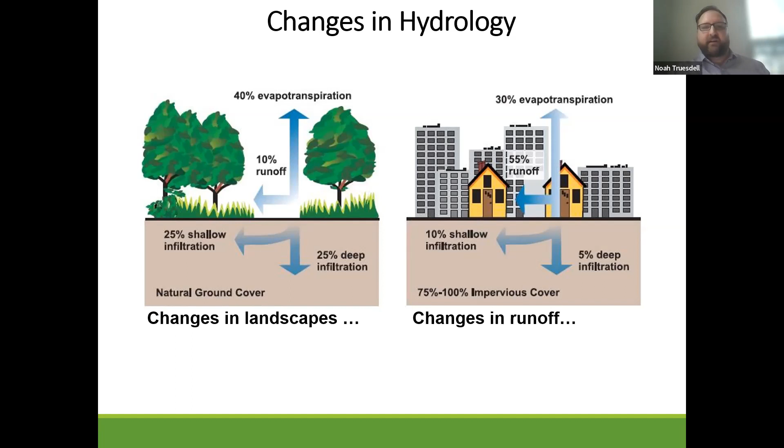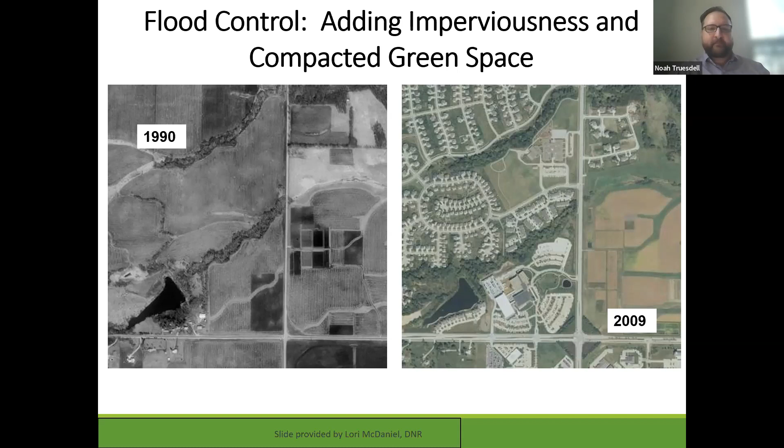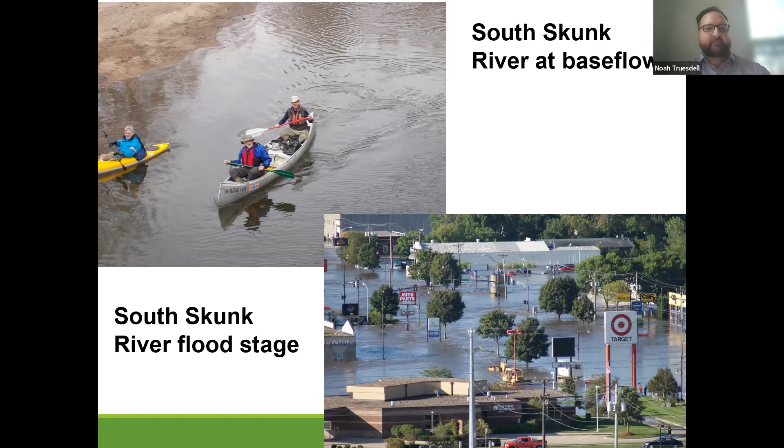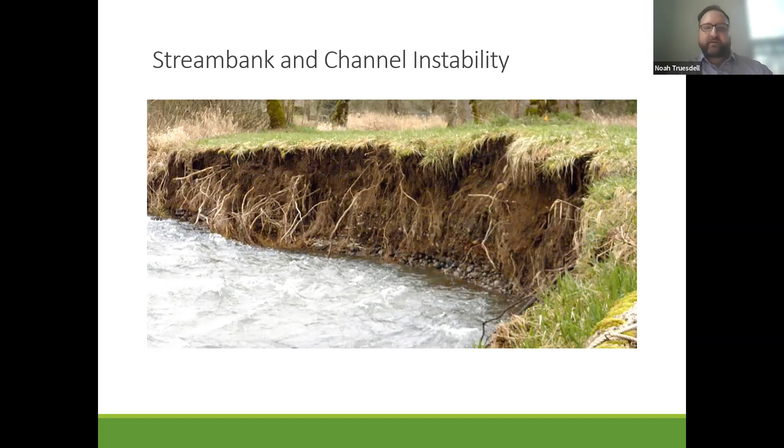So to mitigate that, we want to slow the stormwater runoff and limit how much is entering the stream at one time, as much as we can.

The other problem here is water quality control. At MS4 cities specifically, the stormwater and sewer systems are not connected, and so stormwater runs straight to a stream via our inlets into the storm drain system, and then outlets into the streams. And so it's not treated at all. Any pollution that enters those storm drains gets into the streams.

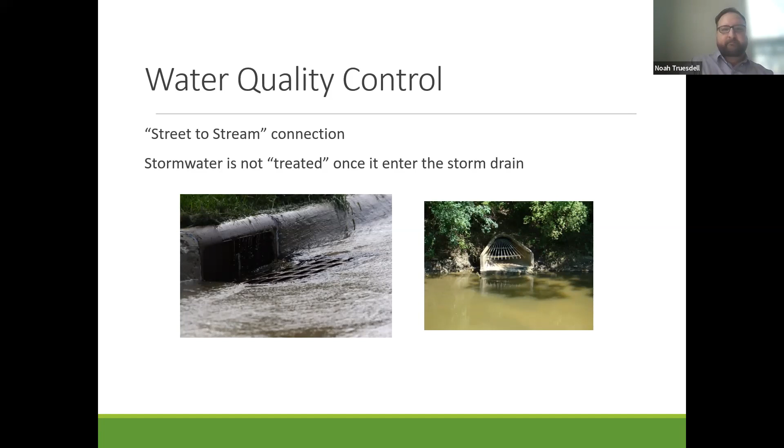The main pollutants of concern in Iowa, or in stormwater - sediment is the primary concern in Iowa. But then you also have hydrocarbons from gas and oils that are on streets from cars and stuff like that. Nutrients from fertilizers used on lawns or in agriculture. Chemicals, paint, stuff like that. Bacteria, pet and animal waste, sanitary waste, and trash and other debris.

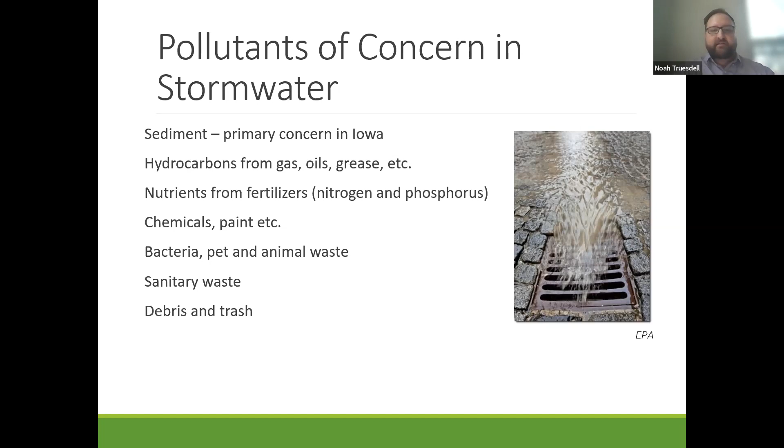The paradigm shift started back in the 70s, where what we were trying to do is just collect, convey, and discharge the water as fast as we could. That's what led to the storm drain system - just get it off the street and to the waterway as fast as you can. And then, like I said, you run into the problems of erosion, flooding, and pollution in your water.

So now what we're trying to do is slow it down, infiltrate as much as we can, and treat that water through the infiltration process. So we're converting some areas from gray to green infrastructure.

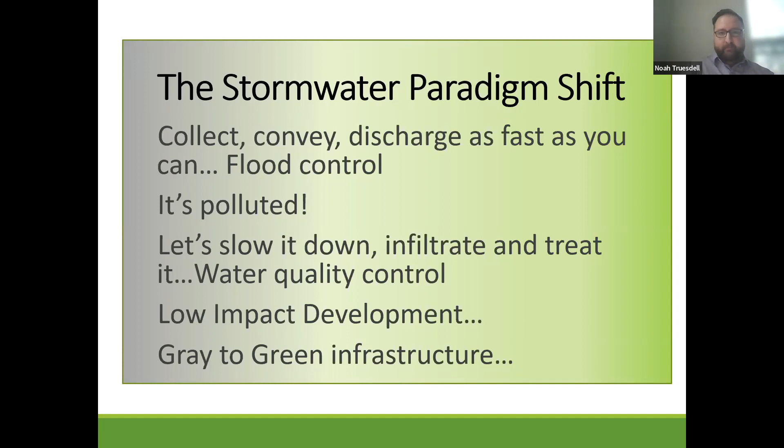And those are public outreach about stormwater impacts, public involvement, illicit discharge and elimination program and ordinance, construction site erosion and sediment control ordinance, post-construction stormwater management ordinance, which would include some of these best management practices that we're about to talk about, and good housekeeping policies.

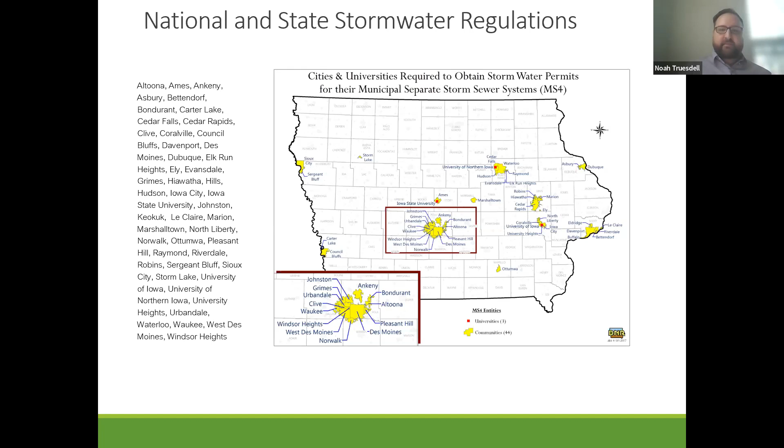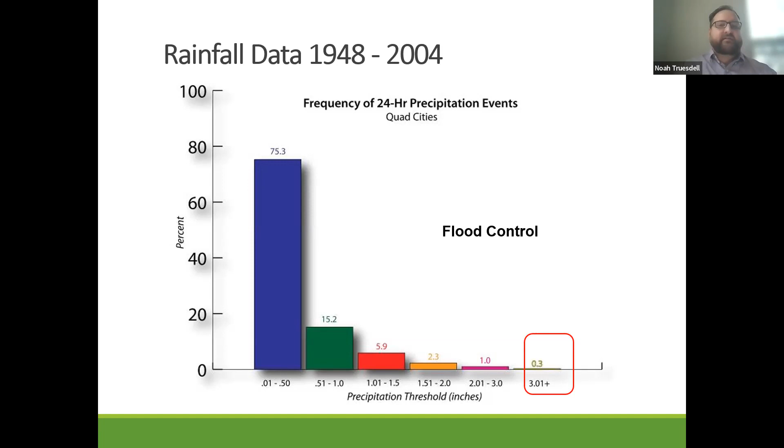And then the flood control volume is 3 inches or more over a 24-hour period. But first, we were just treating the flood control volume, and then here's the same data with the water quality volume listed.

So that led to unified sizing criteria for stormwater best management practices. So what we're trying to do with practices is treat all of these: the water quality volume, where you're trying to treat the quality of the water; channel protection volume, where you're trying to slow the runoff in order to maintain channels and not erode them; and then those larger rain events, we're just trying to store as much of the water as we can and release it slowly.

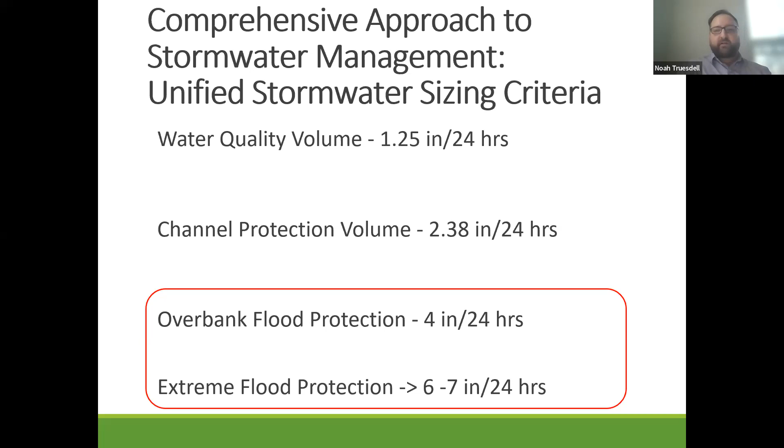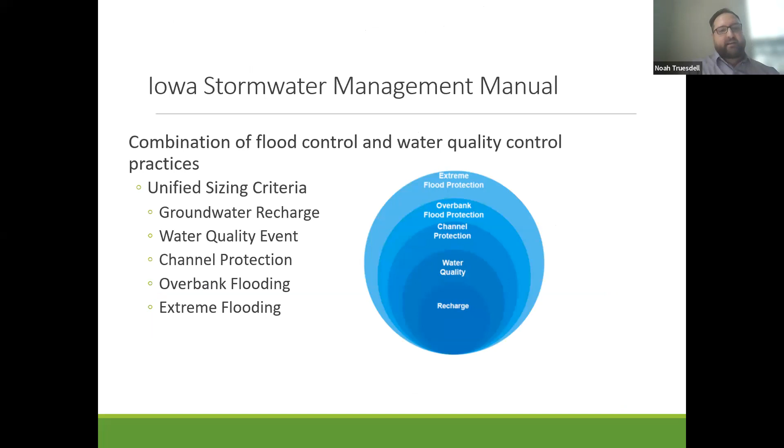And each of these best management practices addresses some or all of these issues. You can find out more about the unified sizing criteria in the Iowa Stormwater Management Manual. So the criteria is trying to recharge our groundwater, control water quality, protect channels, and prevent overbank and extreme flooding.

So with green infrastructure practices, we're trying to mimic the historic hydrology using more natural systems. We want to protect the water quality and capture pollutants through infiltration, filtration, and pollutant breakdown.

We want to reduce peak flow, volume runoff reduction, and reduce the flash floods to prevent stream corridor erosion and reduce runoff, by retaining more water. And then another effect of some of these practices is they create a more beautiful landscape or even recreational benefits.

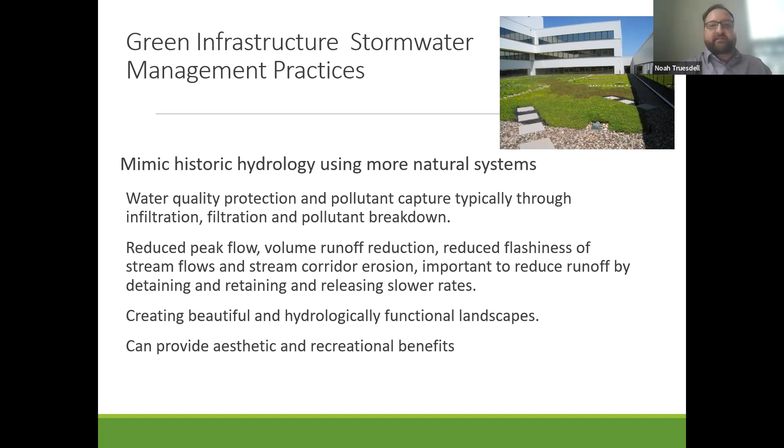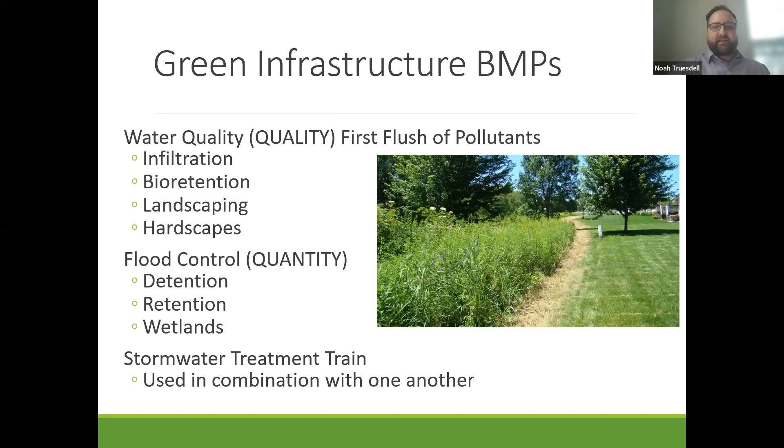So for green infrastructure best management practices, there's some for water quality, which will do infiltration, bioretention, landscapes, and hardscapes. And then flood control, which are detention retention basins and constructed wetlands. Stormwater treatment trains are use of a combination of best management practices between a site and a waterway that combine multiple practices, sending the water through them to do all of these things in a more comprehensive way.

Rainscaping Iowa is an effort of ISWEP, bringing stormwater management to an individual commercial and residential lot basis - that's what rainscaping is. It's just sort of the difference between rainscaping and green infrastructure is the scale to which it's done. And so rainscaping is just landscaping for clean water and to protect streams.

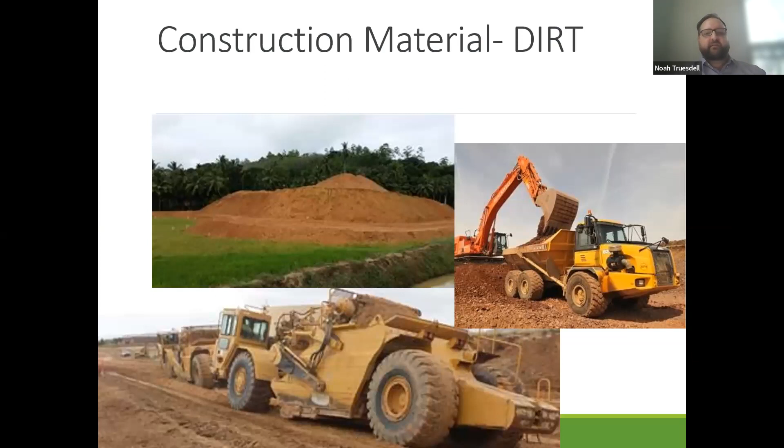Okay, getting into some of our practices - soil management and restoration on urban sites. So soil quality restoration. A lot of the times we just think of soil as dirt, which is more like a construction material, but really soil is a living material. So you have the plants on top, but you also have living organisms in the soil that create more pores in the soil and increase the storage and infiltration capacity of soils.

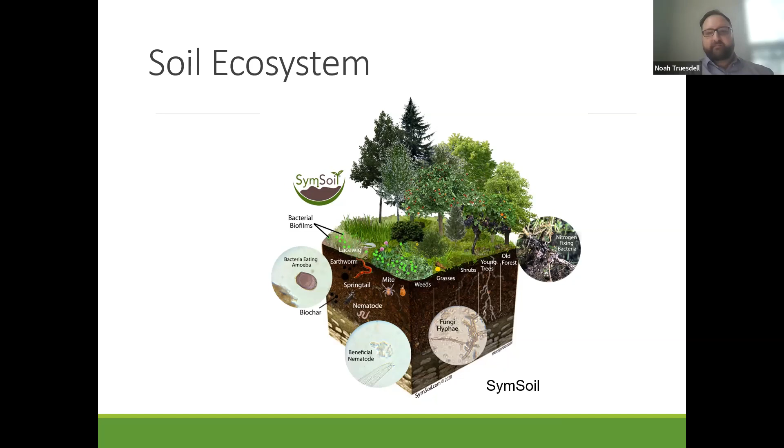Historic Iowa landscapes had 8 to 10% organic matter in soils, and typically now we just see about 1 to 2%. And so SQR is trying to replenish that organic matter.

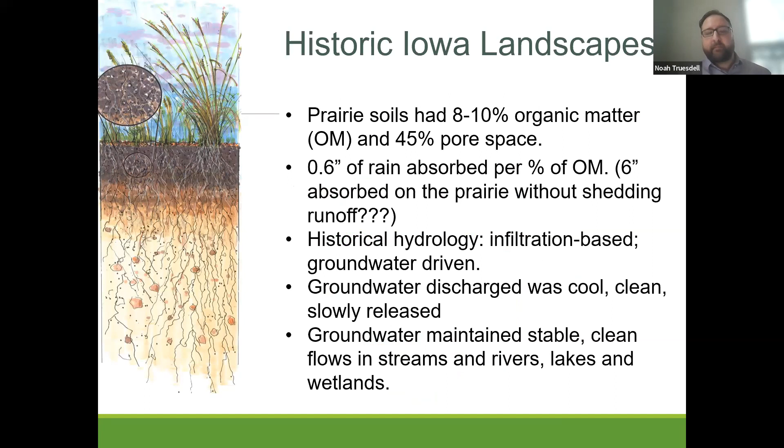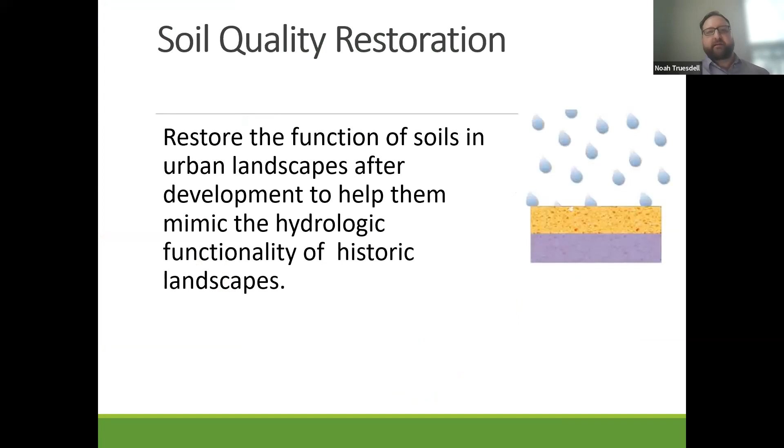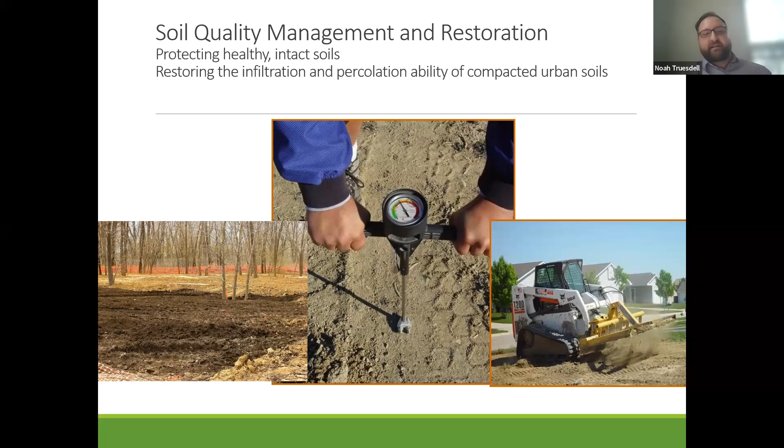Yeah, so with the goal of getting back to that historic landscape, here's some images of people applying SQR. First you're going to deep till or rip the soils.

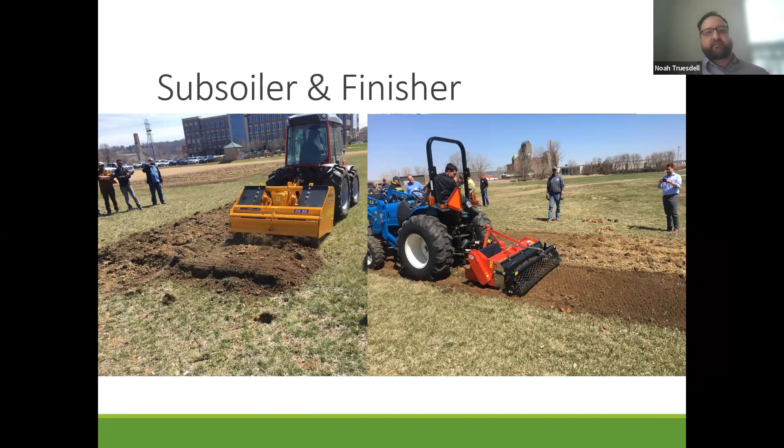And then you'll aerate the soils, which is here on the right, and add another 3/4 inch of compost and then overseeding. And so you can see this house at the bottom right picture has just had SQR done,

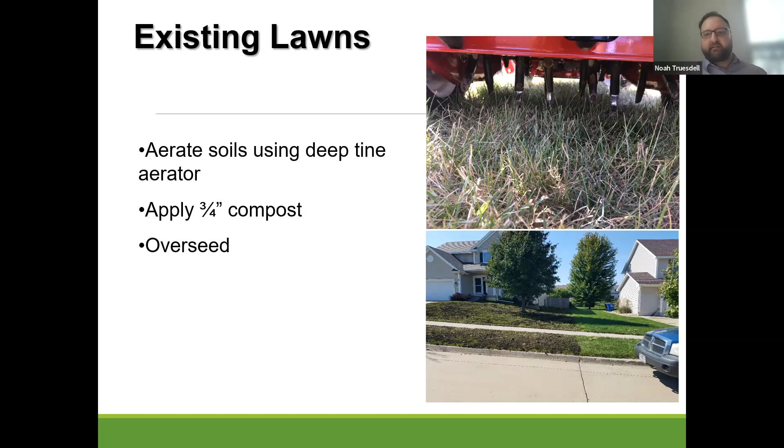and the grass is just starting to grow there again. And then in this picture, you can see a yard that had SQR right next to a yard that has not. It's a pretty good image of how much better a lawn can look after applying SQR.

Also, a lot of cities in the state, including Davenport here, have cost share programs for soil quality restoration, or just adding best management practices to your property in general. And that's another thing that ISWEP is trying to promote as much as we can.

Rain gardens rely on an existing healthy soil profile. They're located in shallow basins on your landscape, or you can landscape a basin for them to be in. They're designed rather than engineered to capture and temporarily store water, a water quality volume, so 1.25 inches in 24 hours or less, using soils and vegetation.

They can be enhanced with an underdrain system. This is typically used with less than ideal soils. They absorb rainwater and remove pollutants from stormwater runoff. And you can plant them with any plants you think look pretty, or you can use natives to get a deeper root system there and assist infiltration further.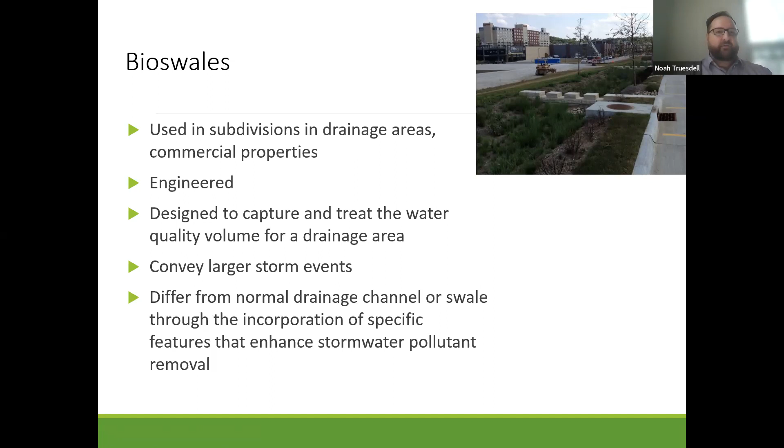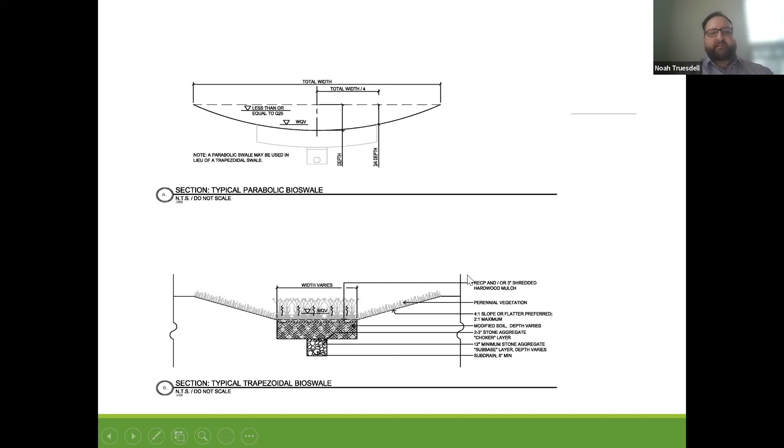Here's a design of two different types of bioswales, parabolic and trapezoidal. This is just talking about the curvature there. And here's a bioswale in Davenport. You can see the check dam there in the middle, and then the vegetated area along the deepest part of the bioswale.

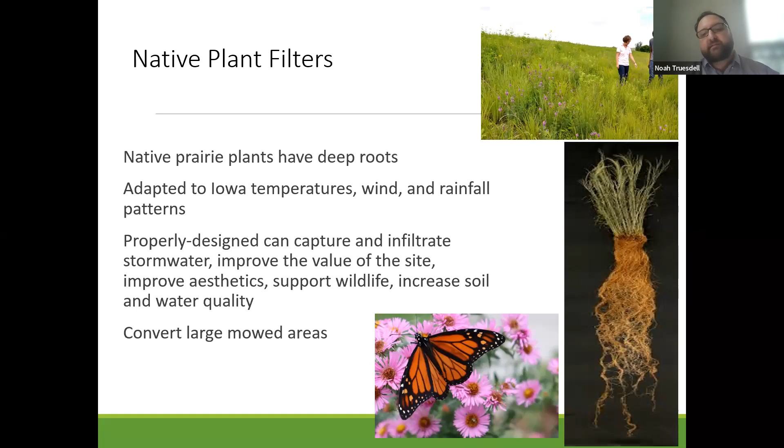Another practice that can be used for rainscaping or green infrastructure are native plant filters. These are strips or areas of native plants. Native prairie plants have deeper root systems than turf grass, and with those deeper systems, they aerate the soil and increase retention and infiltration. An advantage of native prairie plants is they're already adapted to Iowa's climate, and if properly designed, they can capture and infiltrate stormwater, improve the value of a site, improve aesthetics, support wildlife, and increase soil and water quality.

There's also native options for turf grass. Buffalo grass is native to the Midwest and can be used, and looks like a normal lawn, but it's native also.

Hardscaping, which I mentioned earlier, would be permeable pavement systems. These can also be used on a small scale for a driveway, but more often we see them for alleys or streets. They're engineered to drain and store stormwater and slowly release it from the rock chamber below. They may also have some infiltration capacity based on the type of soil underneath them.

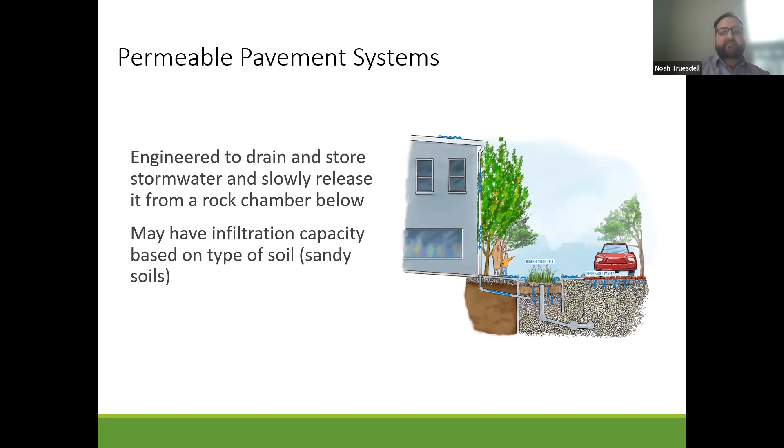So you can see here a side profile of some permeable pavers. You can see the pavers at the top, and then below you have increasing sizes of rock layers that filter and store some of that water before it gets to the perforated pipe on the bottom right.

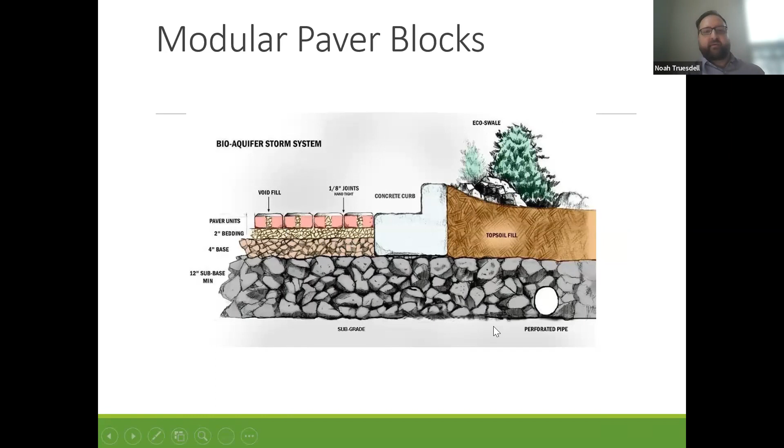Here in Iowa, some cities have a lot of permeable pavers. West Union has 16 blocks of street and sidewalks, and Charles City has 48 blocks.

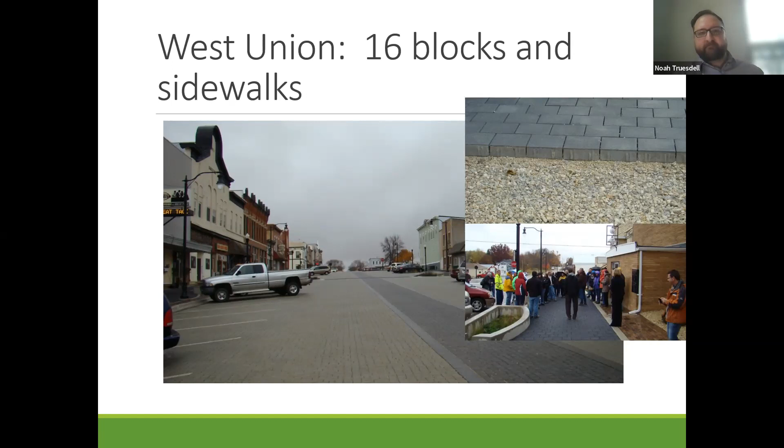Another practice you can implement at home or on a large scale is rainwater harvesting. You can do this at home with a rain barrel attached to your downspout, but once you do that, you might find you need more than one—a lot of rainwater comes off a home's roof.

But here you see some cisterns on top of a commercial building. They can be located above or below ground, and sometimes with these cistern systems, they hook them up to the plumbing inside the building, and it can be used for toilet or urinal flushing.

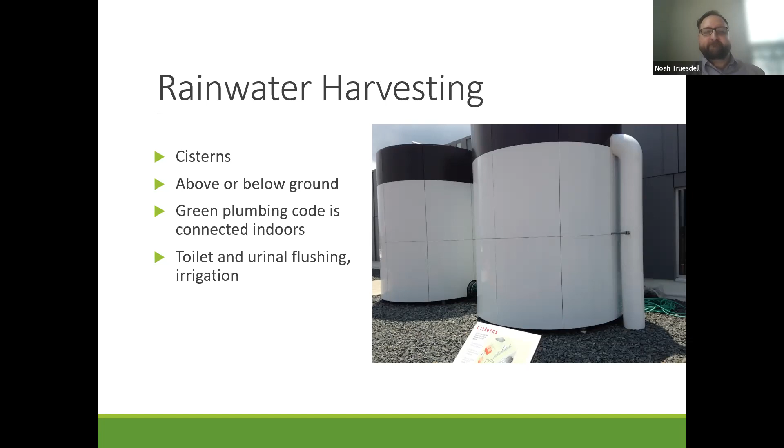Green roofs, another green infrastructure practice. Only some buildings can have this implemented on them. You need to have an engineer come in and check the structure of the building and whether it can support the weight of a green roof.

But they're engineered to capture and infiltrate stormwater. They're usually covered with sedums or other plants that do well without a lot of water, so they can survive between rain events. Green roofs also have the added benefit of reducing energy costs by cooling the building, and can reduce the heat island effect of urban environments.

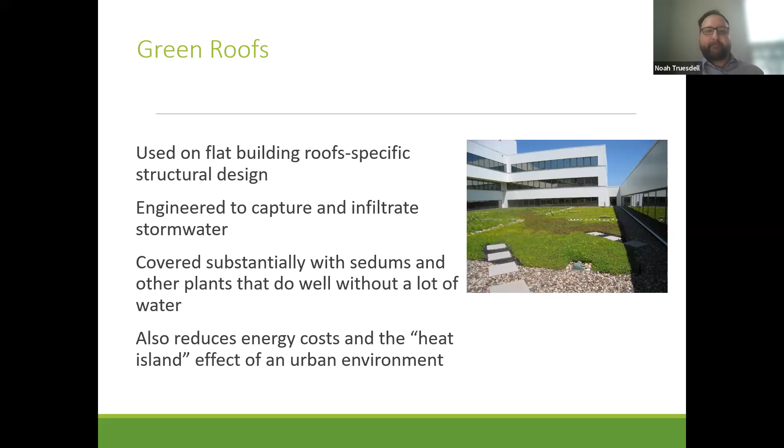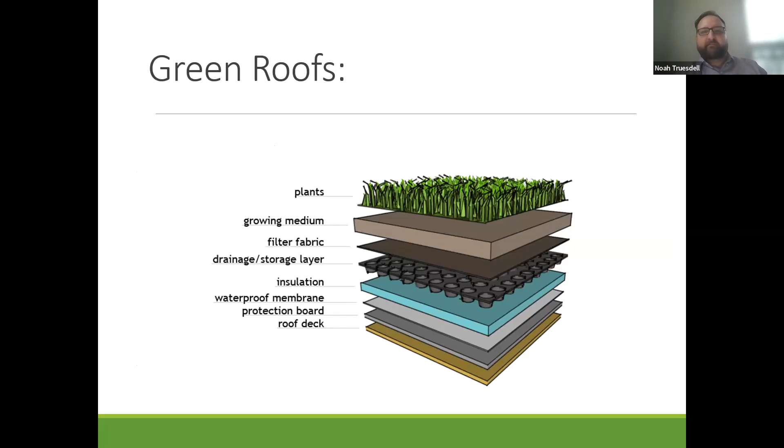So here's a side profile of some green roofs. You have the plant layer, the growing medium or soil, and then a few engineered layers before the roof deck, or manufactured layers.

And then we get into the more flood control best management practices, larger scale water quantity BMPs, which are detention basins or dry ponds, retention basins or wet ponds, and also constructed wetlands.

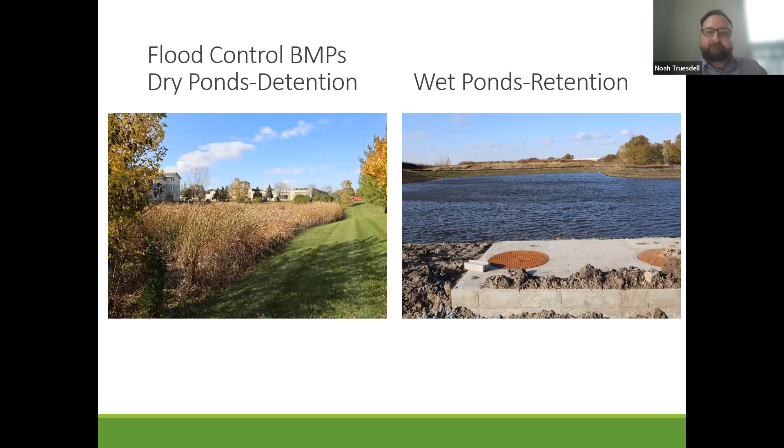Retention ponds or wet ponds store and slowly release storm event quantities of water. But they're also a permanent pool of water—there's always water in them.

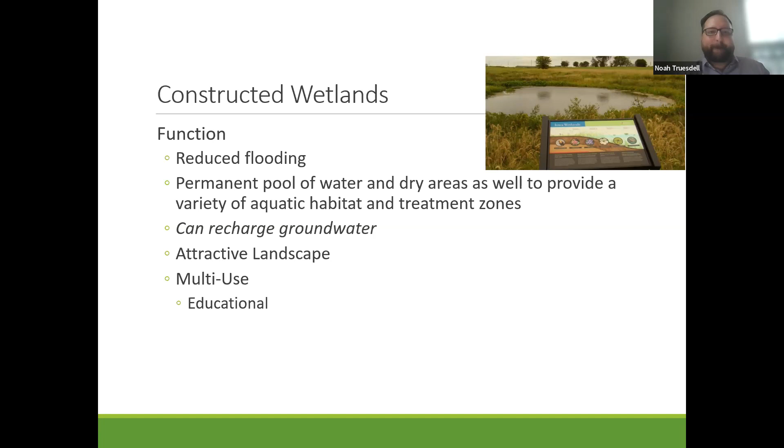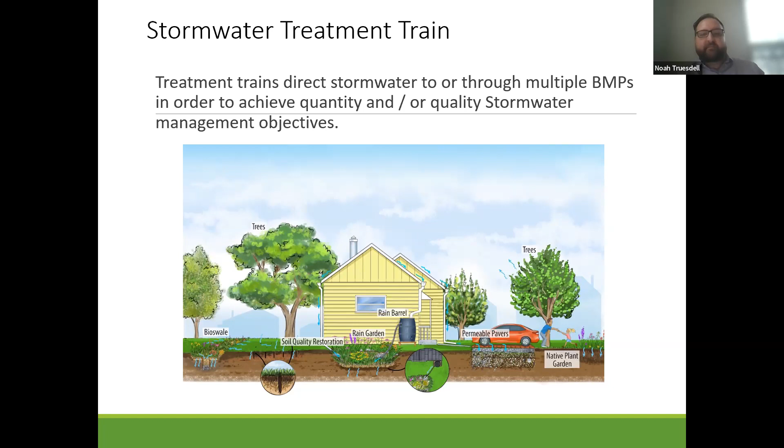By incorporating all these, you capture more water. You're slowing the runoff and filtering as much of that stormwater as you can on a property.

So next actions are: with climate change causing more frequent, intense, and larger rainfall events, we need to think about how we can provide more resiliency to our communities. How can we use green infrastructure on sites to manage stormwater runoff? Can cities and counties support installation of green infrastructure through local cost share programs, and how do we get the community to utilize those cost share programs?

You can always find out more at our website, iowastormwater.org. With partners like Scott County Watershed being a member, they can also provide you with any of our educational materials through the website. You can also find out more about cost share programs at raincampaign.org. That's primarily a Des Moines-based program, but they want to expand it to the state. They've made all of their materials available to anyone, and they're just trying to get people to use their cost share programs for their own properties.